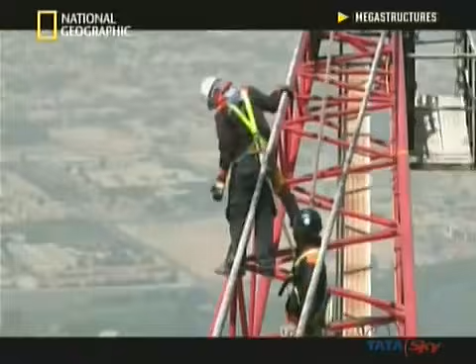The Burj Khalifa in Dubai is the tallest man-made feature on the face of the planet, and one of the greatest achievements in engineering history. To dream it up took outrageous ambition. To put it together requires nerves of steel.

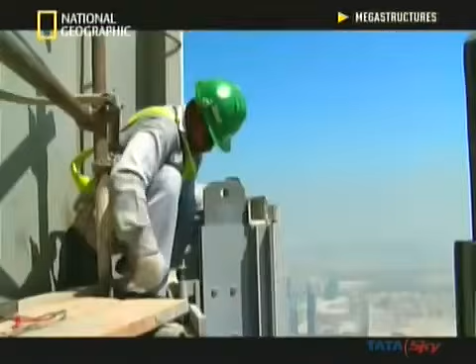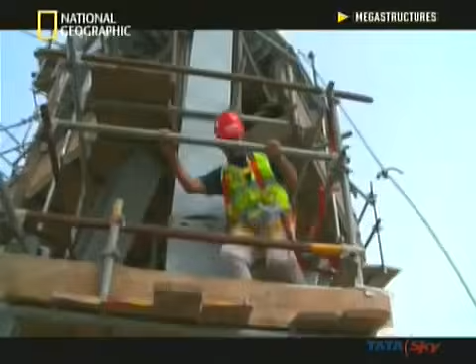Constructing cranes taller. Installing windows higher. Up! And building bigger than ever before. The immediate reaction was, are you crazy? As the construction team makes history, they film it themselves. This is the story of one incredible skyscraper. And the people risking their reputations and their lives to build it. All these people that are underneath this are at risk.

In the Middle Eastern Emirate of Dubai stands an architectural giant. At 828 meters high, the Burj Khalifa is the tallest building on Earth. This $1.5 billion tower opened in 2010 with one of the most spectacular fireworks displays ever seen. But this patch of land once looked very different. 6 years earlier, when construction started, it was little more than a barren, parched, and sun-baked desert.

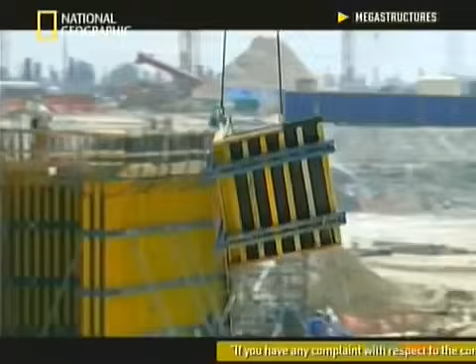In February 2004, the team breaks ground at the Burj site. When you build this big, speed is of the essence. Time is money. There's so much money invested in these buildings, you have to finish them and start recouping your investment. Construction manager David Bradford is the man responsible for getting the job done on time.

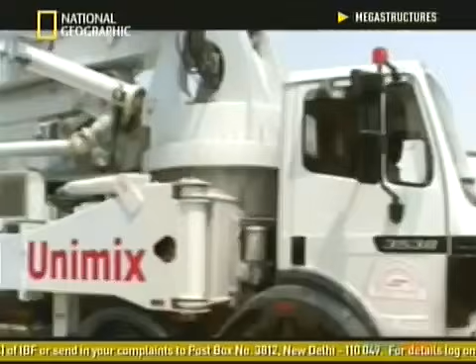So I was ecstatic, just to get a job like this. It's like a dream come true. This is the biggest building in the world. How many people get an opportunity to work on a job like this? But as David starts work, the architects are still finalizing the tower's complex design.

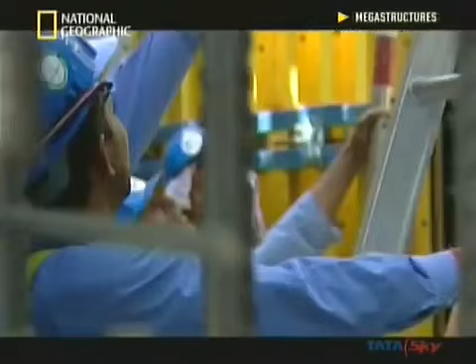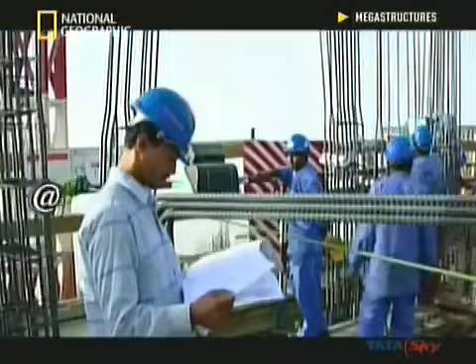The way you build a building like this, you have to fast-track it. So you can't wait until you get all the design in place. You'll be sitting there in your office for 3 years trying to get the design finished before you can tender it. With large parts of the structure still on the drawing board, the construction team heads into the sky.

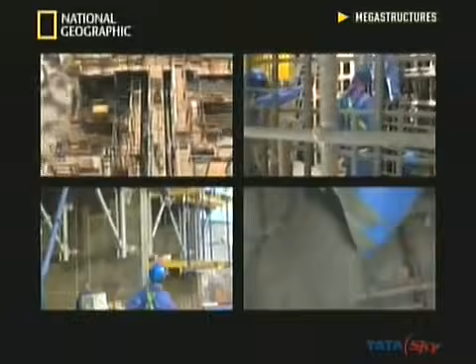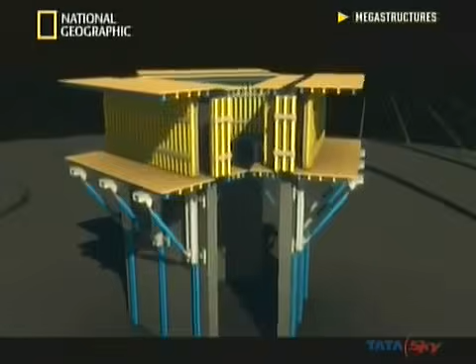The fastest way to build a tower like the Burj is with reinforced concrete, using a process called jump forming. The team builds molds at the base. They insert steel reinforcement bars and pour in concrete. Then when the concrete sets, the team lifts the molds up to the next level. And the process starts again. Using this system, the building begins growing at the pace of one new floor every week.

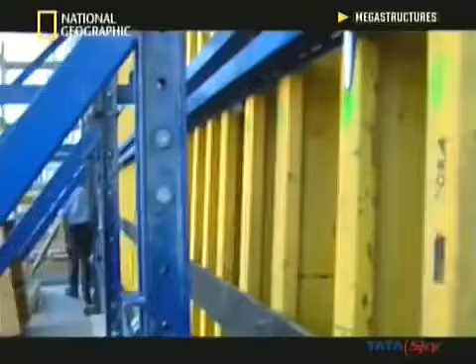When you set the jump form up like this, you put the rebar in, you pour the concrete in the top. 12 hours after you place the concrete, which is liquid, you pull the forms back and you actually climb the hydraulic jump form system up on the concrete that was previously poured. And then that climbs up automatically 4 meters at a time.

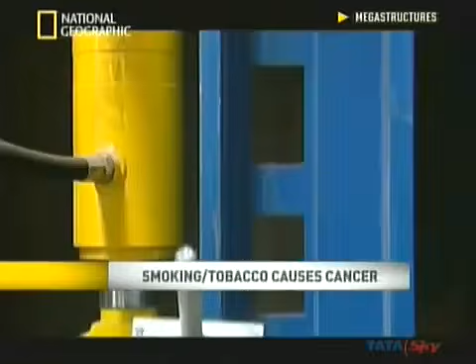The Burj Khalifa is the brainchild of Dubai property developer Emaar. They want to proclaim the city's growing status as a global financial center by building the world's tallest tower. So Emaar has called in one of America's top architecture firms, Skidmore, Owings and Merrill. SOM is based in Chicago, the home of the skyscraper.

As their chief engineer Bill Baker knows, building higher isn't simply a case of taking an old design and adding more floors. The added height creates a unique set of engineering challenges. We're on the 90th floor of the Willis Tower, formerly known as the Sears Tower. As you look out across the Chicago skyline, you see almost a sampler of skyscraper technology. Over here is the Aon Tower, which was formerly called the Standard Oil Building, and it's a single tube.

Each time architects go taller, they must invent new structural systems. If you look, the predecessor to the Sears Tower, the John Hancock Tower, it's called a braced tube. So you can see the diagonal bracing on each of the four sides ties all those columns together so that it acts as if it's one tube acting together. One of the last great structural inventions came with the tower that Bill is standing on. At 442 meters, the Willis Tower was the world's tallest building until 1996. Its design is called a bundled tube.

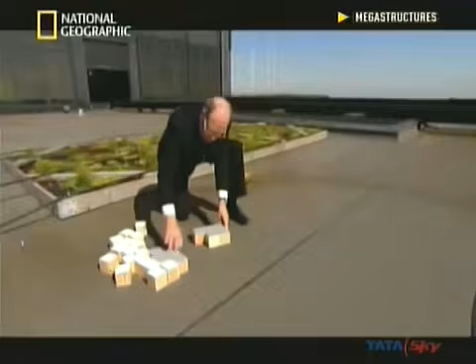Essentially, it's made up of 9 towers bound together to create a single rigid structure. But this design has its limits. This 9 tubes is sufficient for a building of this height, at 442 meters, but what if you wanted to go taller? Say you wanted to go up to over 700 meters. Well, you got to make the footprint bigger.

But as we do this, we've gone from something that was 3 wide to something that's 5 wide. So you have a huge amount of area, which is difficult to market, and what's more important is that the space becomes very, very deep. In buildings, you want to have views, you want to be able to see out the window. And you can see your occupants would be so far from the views from the skin as to render the building unusable.

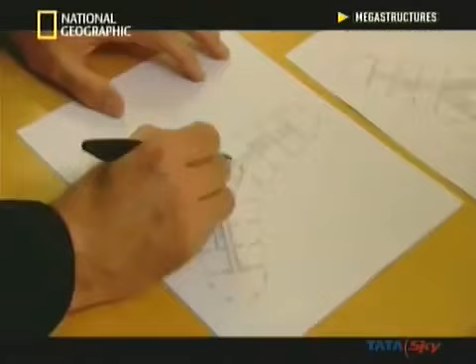To create a taller tower with bright internal spaces, Bill and his team devise a new structural system. The structural system we use for the Burj Khalifa is the buttress core. Now the core is the center hexagon in the middle of the building, and that's what's used to resist the twisting forces on the building, okay? But it's much too slender to go to such great heights. So it needs to be buttressed.

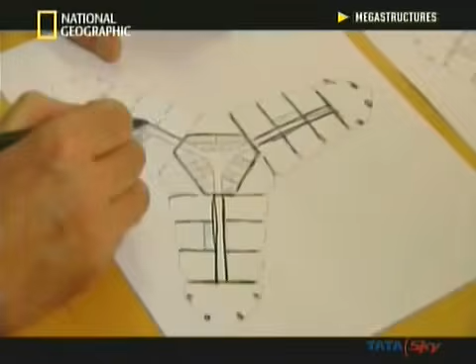Now the buttresses are the 3 wings that come off. It's consisting of these walls that go down the corridors. So you can see how this core has been buttressed in 3 directions by the structure going on the wings. To my knowledge, it's never been done anywhere else. And so it's a unique solution to a very interesting problem.

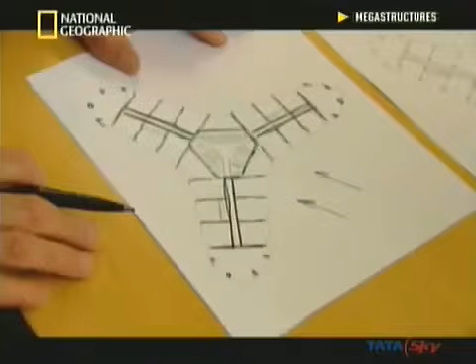With the buttressed core concept, natural light floods the interior. We've come up with a solution which allows us to go very, very tall, but it's light and airy on the inside. It's as if you were in a 10-story building rather than a 160-story building. In SOM's design, the large tower base helps support the huge weight of steel and concrete. Then, as the building climbs, the buttresses step back in a rising spiral. The team then coats the design in glistening mirrored glass to reflect the desert heat and light.

If you were to compare the Burj to an automobile, you'd be talking about Lamborghinis or Ferraris. It's all about performance, and this building is at the highest level of performance. This quality comes at a price. The building cost was a closely guarded secret. We heard some general figures that were thrown out. We guessed that it was somewhere in the $1.5 billion range, but we weren't privy to a lot of that information. And again, I think the jury's still out.

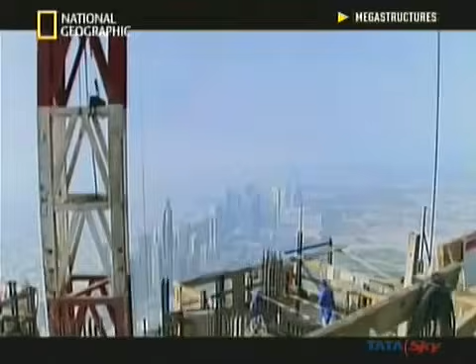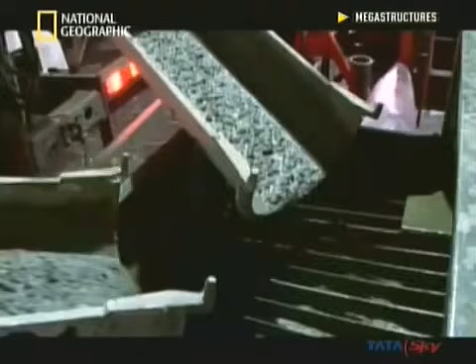Making this billion-dollar design a reality will be a mammoth task. The most basic construction materials must be super-powered. Strength of concrete was key here, absolutely key. And we produced concrete here that nobody produced anywhere else. The team uses over 25 separate ingredients to create concrete that stays liquid as it's pumped up the building and then turns solid extremely fast.

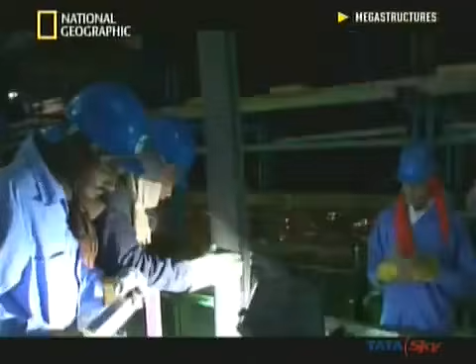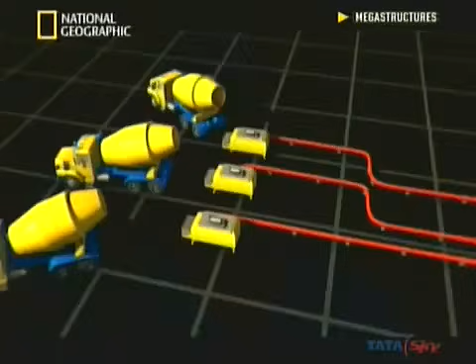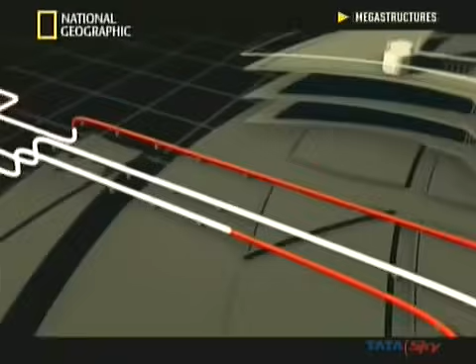But getting this special mix to set is a massive challenge in Dubai, with temperatures rising over 45 degrees Celsius. If the concrete is too hot, it'll set instantaneously and you can't even place it. You have to pour at night when the temperatures are lower, and you have to put in ice and chilled water in the concrete mix. To lift this mix up the building, the construction team uses 3 of the world's most powerful concrete pumps. Over 32 months, the pumps deliver 165,000 cubic meters of concrete, enough to lay a sidewalk 880 kilometers long.

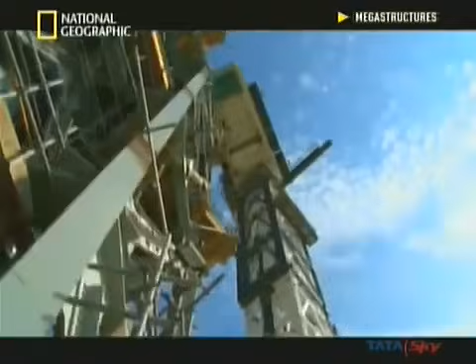The team will then top the concrete tower with structural steel. And as this building rockets out of the desert, men and machinery will go to greater heights than ever seen before. Okay, over the edge. The city of Dubai is home to 17 of the 100 highest skyscrapers on Earth. But they're about to be dwarfed by a monster.

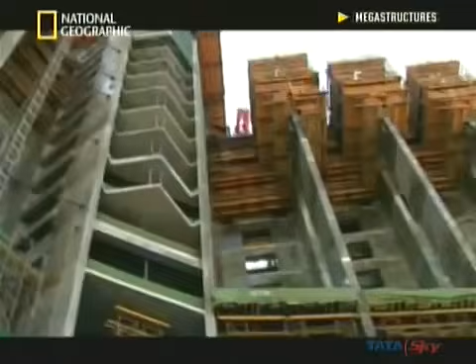As construction accelerates, the Burj Khalifa is now growing a new floor every 3 days. The idea is keep the ball rolling, never stop construction at any point in the project until you're finished. The building's handed over, that's it. That's when you can relax. While this process continues, there is still one fundamental detail to resolve.

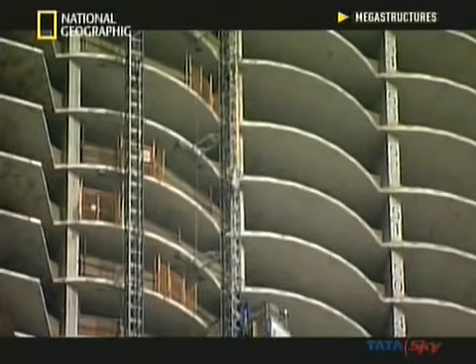The architects still haven't decided on the building's final height. Usually minor things change, and this one, major things changed. The foundations went in way before we figured out the final height of this building. It's an issue that has to be cleared up, fast.

The landmark to beat is the 508-meter tall Taipei 101 in Taiwan. SOM's original design is just 10 meters higher. And one of the reasons why we did that is we didn't want to promise more than we knew we could deliver. But the architects soon calculate that the structure is so strong, it could stand over 300 meters taller.

We kept on making the building taller and taller. And so it actually grew to about 725 meters there for a while. It stayed there for a while, then eventually grew up to around 800 meters and finally ended up at the 828 meter height. When complete, the Burj will stand 828 meters above the ground. The question is, are the foundations strong enough to hold it up?

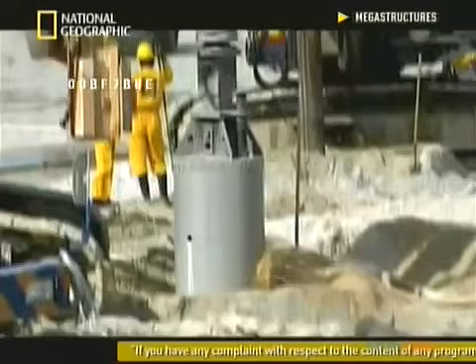Early on in construction, analysis of the ground under the site highlighted a problem. It's not like when I worked in New York City, you get good granite there, you go down 4 or 5 meters, you're into good granite, and that's what you sit your foundation on, the granite itself. Here the ground is a top layer of sand, 3 or 4 meters of sand, and you get into weak sandstones, weak limestones, nothing very good.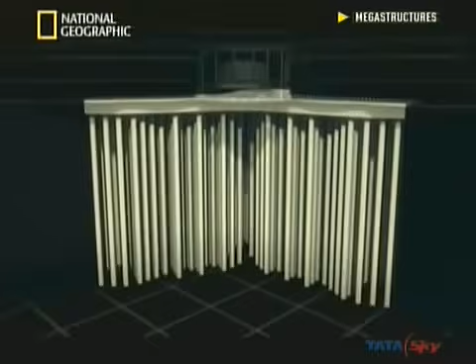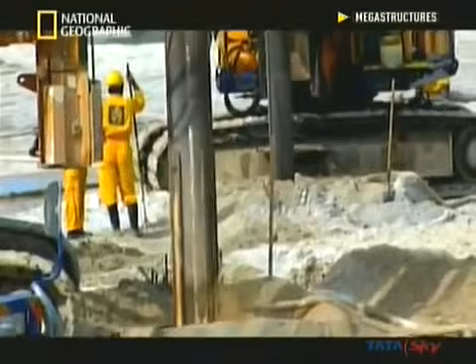But science provides the answer. The future of the Burj Khalifa and its entire colossal weight rests on one scientific principle: friction. There's basically 2 methods in piling. One is end-bearing piles, which is you put the pile directly on the hard rock. That's what can sustain the load. But here we went with skin friction piles, where the weight of the tower is carried on the friction of the side of the pile.

The foundations of the Burj rely on the super strong grip created between the ground and the sides of each pile. Beneath the tower, the team has driven 192 piles to a depth of 50 meters to support a 3.7 meter thick raft of solid concrete. These foundations must hold up a building that weighs over 500,000 tons.

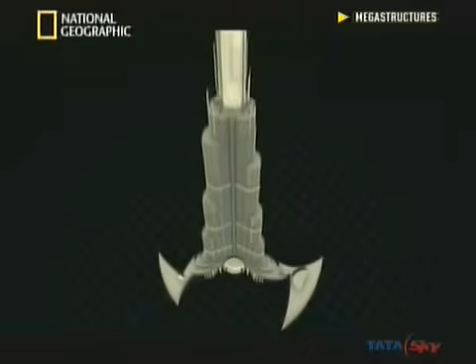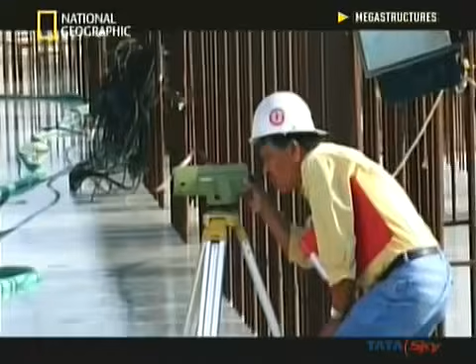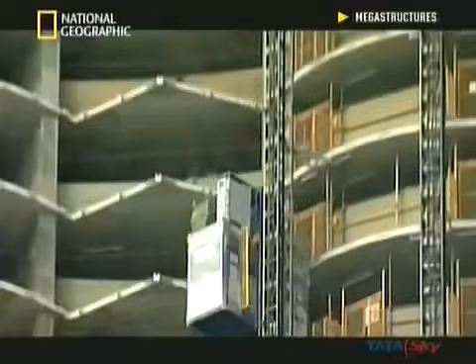The numbers are so big that the team has to allow for a small degree of settling in the design. Once we evaluate all the total load of the building, live and dead loads, we expect the foundations to settle about 75 millimeters. But the foundations should hold. 3 years after breaking ground, construction reaches 512 meters and 141 floors. The Burj is now the tallest building on Earth.

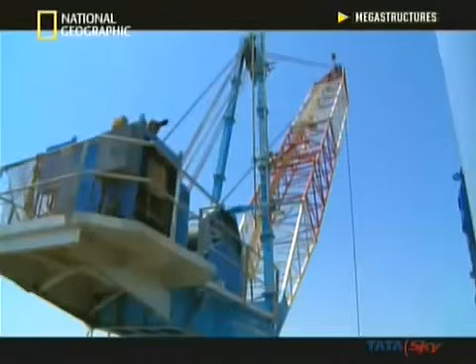To help move materials, the team hires 3 of the biggest construction cranes in the world. I mean, these are very specialist cranes, actually huge. They weigh 120 tons dead weight. That's the crane itself, without anything on the hook. The high-wire act of installing the cranes falls to a special group of men. Sharif and his team of crane riggers.

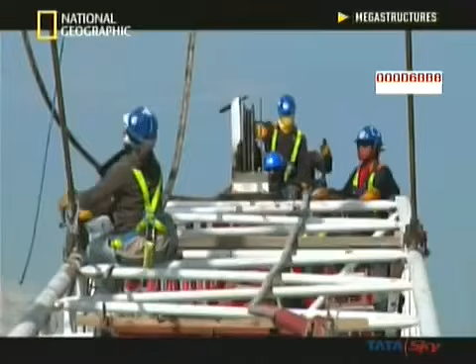These men come from every part of the globe, and many speak different languages. But they have 2 things in common: a strong nerve and an incredible head for heights. Their task is to erect the cranes and keep them working smoothly. All without a single slip. They never ever lost sight of the ground and the edge of the building, and it was amazing that these people were so comfortable.

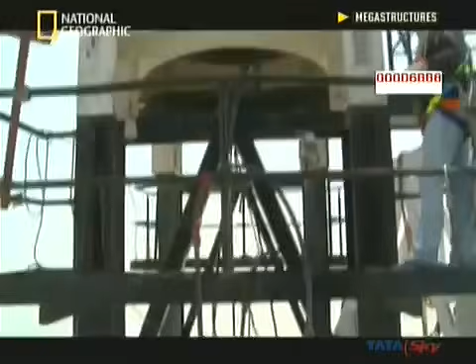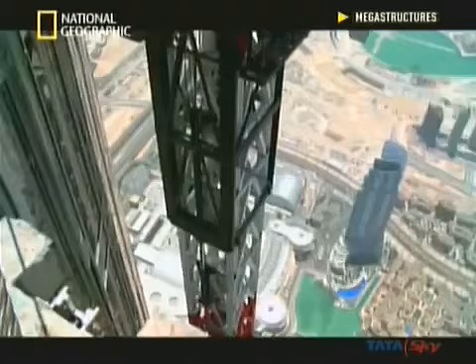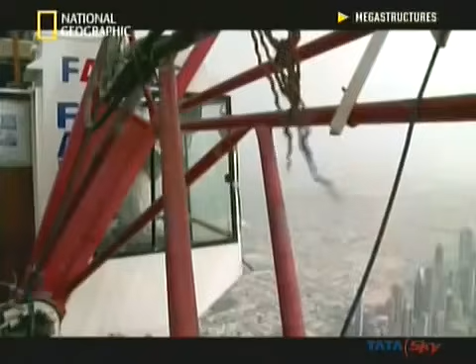The cranes contain an ingenious self-jacking mechanism, so they can grow alongside the rising building. As every new floor is completed, Sharif and his team add another section to the tower support and lift each crane even higher. You need a steady hand to operate the highest construction crane in the world. And one of the few trusted with the task is Mohammed from Pakistan.

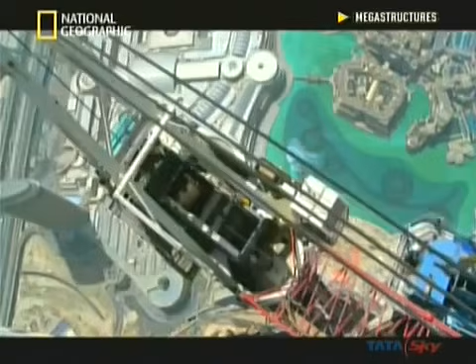I'm on duty for 12 hours, from 7 in the morning until 7 in the evening. There was a myth going around that the crane operator lived in the cabin, but I think the cabins are too cramped and uncomfortable. At 700 meters up in the air, Mohammed's crane cab is nearly twice as high as the Empire State Building. I like heights.